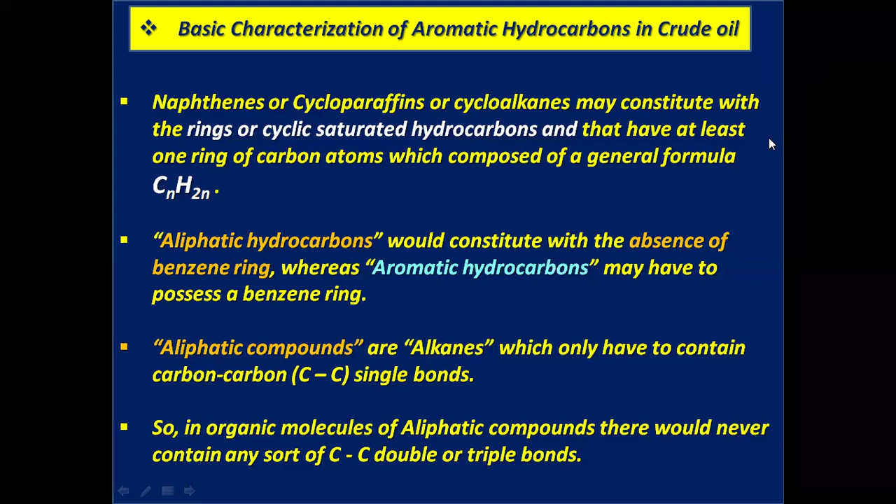Aliphatic compounds are alkanes which only have to contain carbon-carbon, that is CC single bonds. So, in organic molecules of aliphatic compounds, there would never contain any sort of CC double or triple bonds. Most important. Aliphatic compounds might be of different structures such as cyclic, linear, or even branched. The absence of multiple CC bonds in the structure of aliphatic compounds would therefore be represented as the most distinguishing feature.

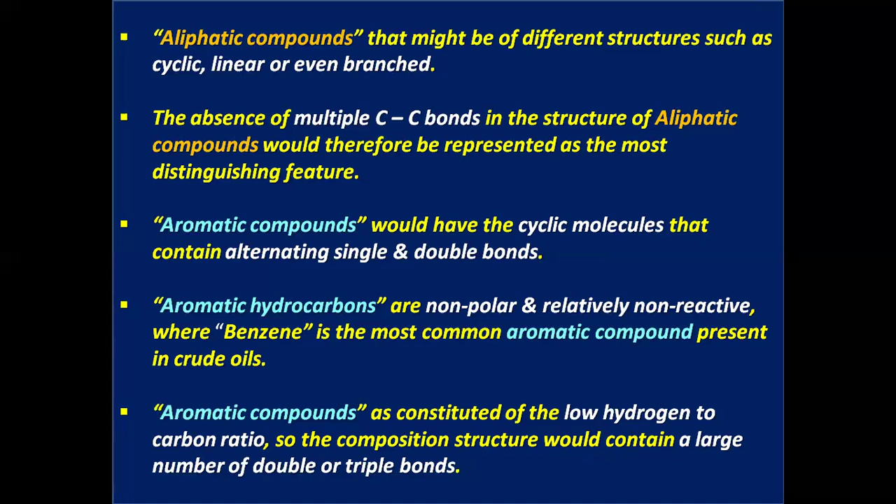Aromatic compounds would have the cyclic molecules that contain alternating single and double bonds. Aromatic hydrocarbons are nonpolar and relatively non-reactive type, where benzene is the most common aromatic compound present in crude oils. Aromatic compounds, as constituted of the low hydrogen to carbon ratio, so the composition structure would contain a large number of double or triple bonds. Aromatic compounds are thus to exhibit a high degree of chemical stability compared to alkanes and cycloalkanes, saturated aliphatic compounds.

Aliphatic hydrocarbons would be the most abundant fraction in crude oil whose molecules are linear or branched open chain structures, such as n-alkanes, isoalkanes, cycloalkanes, naphthenes, etc. Aliphatic hydrocarbons may be of saturated or unsaturated hydrocarbons with having double carbon bonds. However, saturated and unsaturated hydrocarbons would depend on the type of bonds they contain.

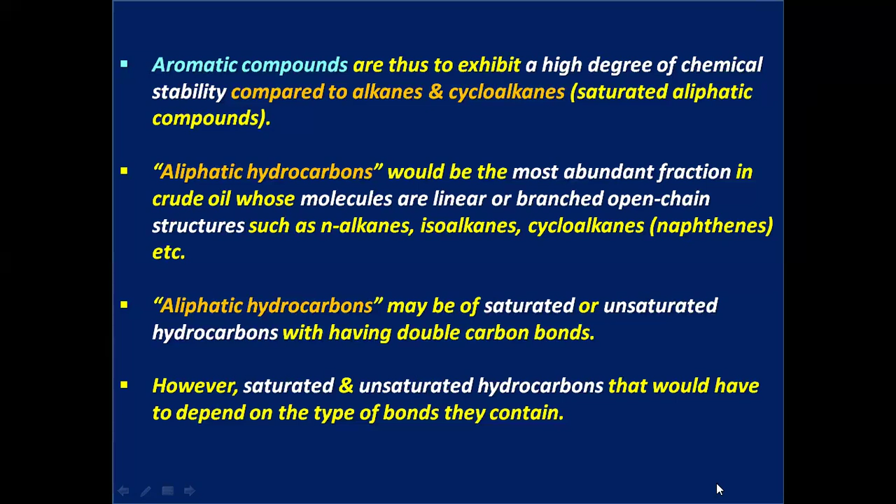Saturated hydrocarbons should contain only single covalent bonds, that is alkanes, whereas unsaturated hydrocarbons would contain at least one or more double CC bonds, that is alkenes, or triple CC bonds, that is alkynes. Due to the presence of multiple bonds in unsaturated hydrocarbons, these hydrocarbons are much more reactive than the saturated hydrocarbons. Again, I repeat, due to presence of multiple bonds in unsaturated hydrocarbons, these hydrocarbons are much more reactive than the saturated hydrocarbons.

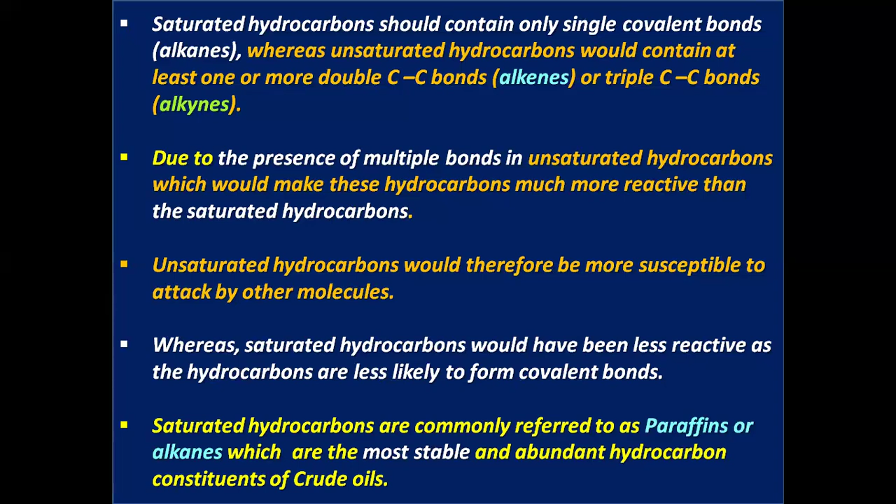Unsaturated hydrocarbons would therefore be more susceptible to attack by other molecules, whereas saturated hydrocarbons would have been less reactive as the hydrocarbons are less likely to form covalent bonds. Saturated hydrocarbons are commonly referred to as paraffins or alkanes, which are the most stable and abundant hydrocarbon constituents of crude oils. Unsaturated hydrocarbons are commonly referred to as olefins or alkenes. However, olefins are not naturally occurring constituents of crude oil. Normally, olefins would have been produced during the active process of the crude oil refining cycle.

Aliphatic saturated hydrocarbons with low molecular weight would be of liquid or gaseous form, which include methane, that is CH4, ethane, CH3CH3, propane, that is CH3CH2CH3, and butane, CH3(CH2)2CH3. Perhaps in most of the crude oils, the absolute amounts of aliphatic hydrocarbons with high molecular weight are found to be quite small, which may generally be of the order 0.5 to 2 weight percentage. These crudes are commonly referred to as the high wax crude oils.

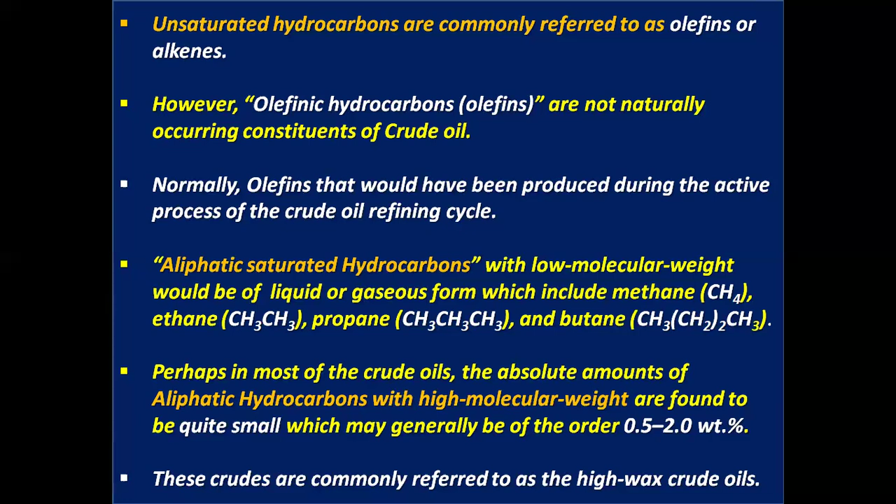Evaluation of crude oil characteristics. Elements present in crude oils would thereby form a large variety of complex molecular structures and thus depend on the actual variation in proportions of these constituents, causing a wide change in chemical as well as physical properties of the crude oils. In normal case, crude oils are often categorized on the basis of chemical composition as constituted by the proportion of hydrocarbon contents.

There are different classes of hydrocarbons which would be the bulk of the constituents present in crude oils. So, crude oils are thus characterized by the molecular distribution of individual hydrocarbon composition along with the presence of sulfur content. Apart from all sorts of variants, it has been evaluated that most of the crude oils, as being composed of hydrocarbons, may have the possible range of 12 to 15% hydrogen by weight and 82 to 87% carbon by weight.

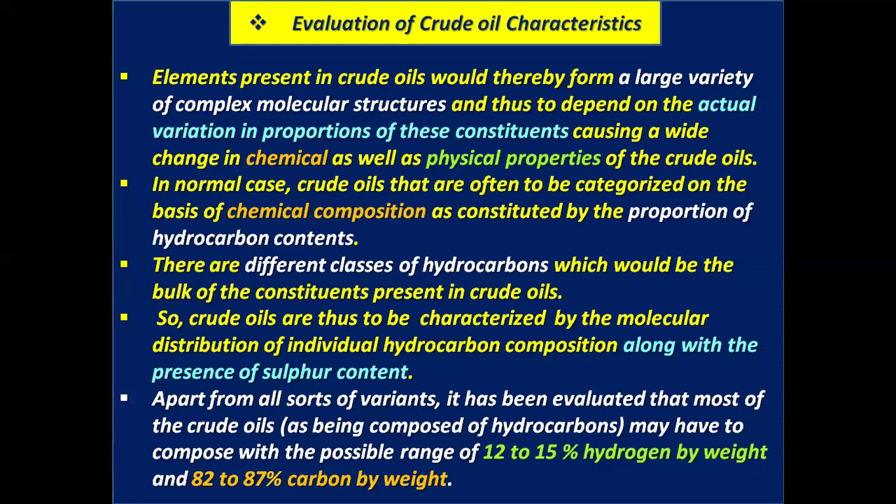Most important, 12 to 15% hydrogen by weight and 82 to 87% carbon by weight. The non-hydrocarbon compounds such as sulfur, that is about 0.5 to 3% by weight. Oxygen is less than 1% by weight, and nitrogen is less than 1% by weight. Though their concentrations are very low, they still have a strong influence on the crude oil composite characteristics, out of which sulfur is the most critical component.

A sulfur content of 1% or more by weight present in crude oil, either as elemental sulfur or in compounds such as hydrogen sulfide, would be rather alarming, and needs to be extracted from crude oil during refining. Through analysis, it has been established that heavier crude oil generally has a higher percentage of sulfur by weight. Specific gravity is therefore the most important physical property through which crude oils can be classified as heavy, medium, and light.

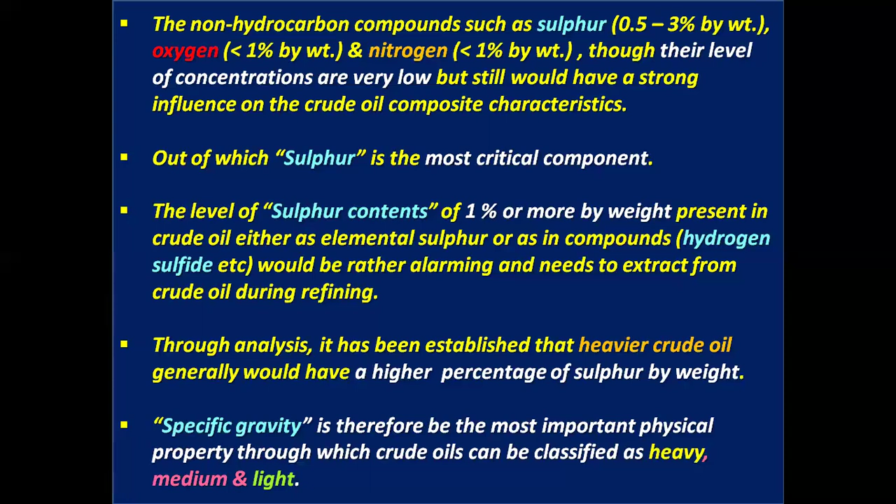API gravity equation. The physical properties of crude oils differ substantially due to variation of chain length of the constituent hydrocarbons and additional components such as sulfur. During production of crude oils, the classifications heavy, medium, and light can be evaluated by determining the values of density, specific gravity, and API gravity. All these parameters are measured in accordance with the process recommended by the standards ASTM D5002 and ISO 12185. The American Petroleum Institute, API, has standardized a unit for liquids called API gravity.

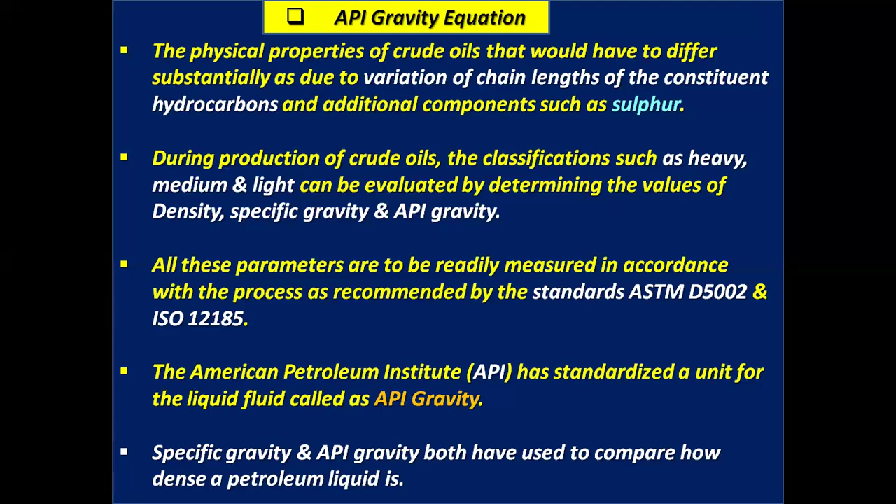Specific gravity and API gravity are both used to compare how dense a petroleum liquid is. The American Petroleum Institute has adopted the process to provide a standard way of measuring the density of crude oil and liquid hydrocarbons. The API gravity scale is based on the principle of comparing the weight of a given volume of liquid hydrocarbons with the weight of an equal volume of water.

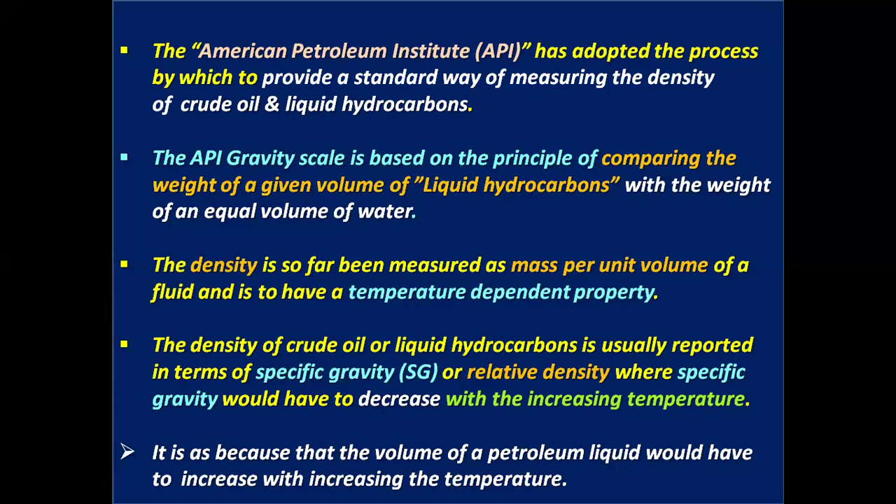Density is measured as mass per unit volume of a fluid and is a temperature dependent property. The density of crude oil or liquid hydrocarbons is usually reported in terms of specific gravity or relative density, where specific gravity decreases with increasing temperature. This is because the volume of a petroleum liquid increases with increasing temperature. So, the density must be measured at a given temperature, and according to the API standard, the measuring temperature is 15.6 degrees centigrade, that is 60 degrees Fahrenheit.

Therefore, specific gravity of liquid hydrocarbon is equal to the density of liquid hydrocarbon at 15.6 degrees centigrade divided by the density of liquid water at 15.6 degrees centigrade. Density of liquid water at the reference temperature 15.6 degrees centigrade is 0.999 grams per centimeter cube. Specific gravity of liquid hydrocarbon equals density of liquid hydrocarbon at 15.6 degrees centigrade divided by 0.999 grams per centimeter cube.

The measuring scale of API gravity is calibrated in degrees API and calculated from the following equation. API gravity, degree API of liquid hydrocarbon, equals 141.5 divided by specific gravity of liquid hydrocarbon at 15.6 degrees centigrade. In contrast to the relation of specific gravity and temperature, the API gravity scale increases with the increase of temperature.

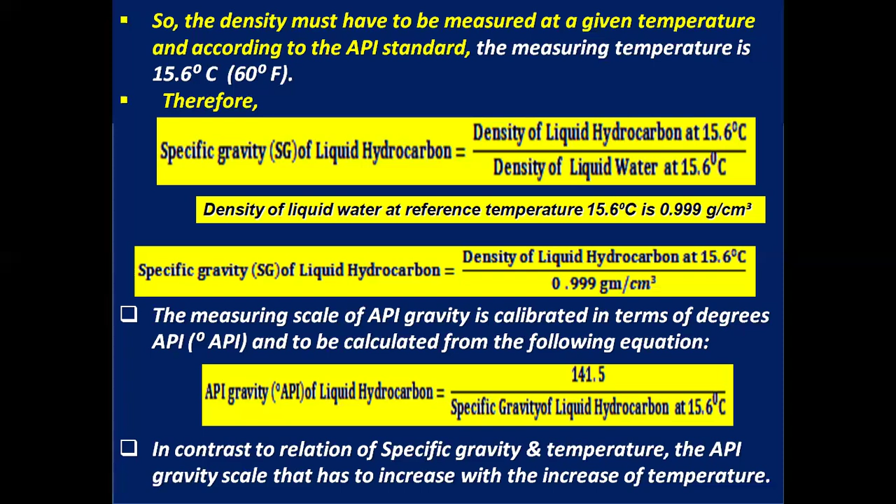Heavy crude oil is referred to as having an API gravity less than 20 degrees, and crude oil having an API gravity less than 10 degrees is referred to as extra heavy crude oil. So, heavy crude oil has API gravity less than 20 degrees, and crude oil having API gravity less than 10 degrees is referred to as extra heavy crude oil.

As compared to lighter grade crude oils, the physical properties differ in the case of heavy crude oils, which include higher viscosity and specific gravity, with a hydrocarbon composition of higher molecular weight. Extra heavy crude oil correlates with the various physical and chemical properties of natural or crude bitumen having a viscosity greater than 10,000 centipoise. 1 centipoise equals 10 to the power minus 2 poise, that is 0.001 kg per meter second.

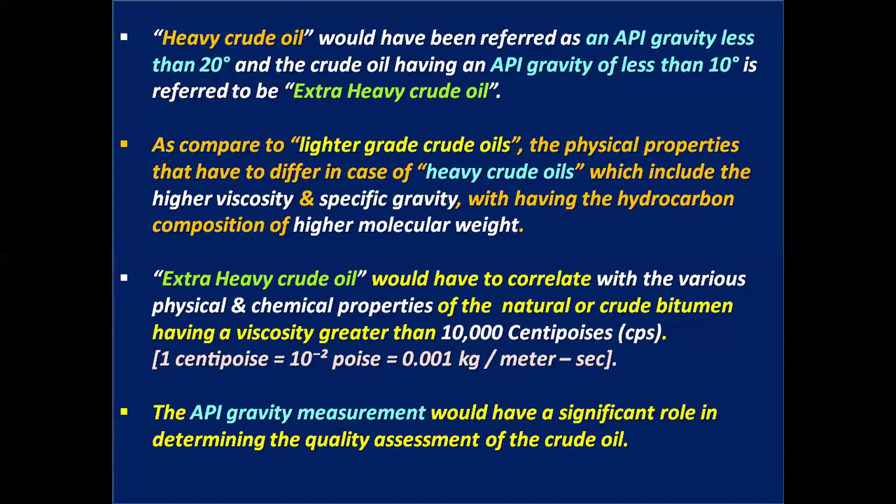The API gravity measurement would have a significant role in determining the quality assessment of the crude oil. However, along with viscosity and API gravity, it is very important to verify the hydrogen to carbon atomic ratio, oxygen to carbon atomic ratio, volatiles, composition of hydrocarbon compounds, as well as presence of sulfur content in crude oils.

Through API gravity measurements, the refineries would be able to optimize their operational as well as processing techniques of refining the crude oils, with temperature-oriented different composition and their chemical characteristics. Most important, the lighter and less dense crude oils, which have higher API gravity values, are often considered more desirable in high value industrial applications. That is, the cost of lighter or less dense crude oils is much higher as compared to heavy or extra heavy crude oils.

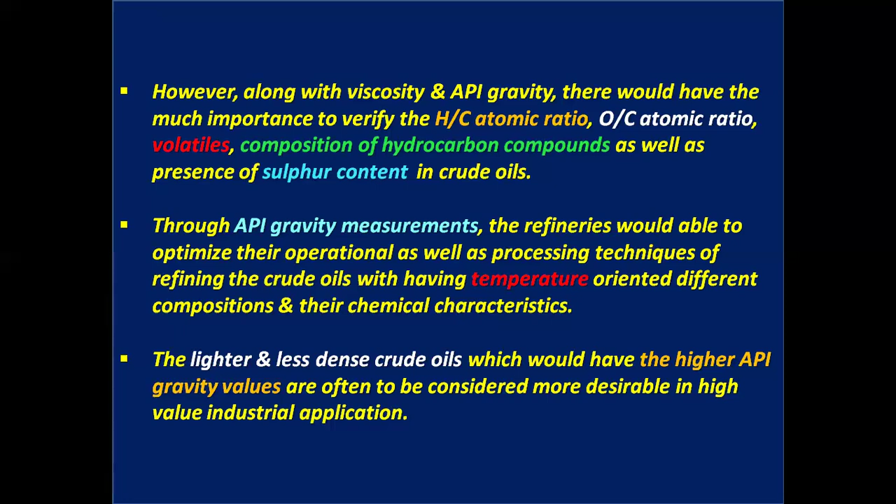Criteria for determining the crude oil quality assessment. Many types of crude oil with different quality characteristics are produced around the world and are categorically distinguished by their respective underlying elemental compositions. See, the elements in crude oil and their composition in weight percentage: carbon, 83 to 87. Hydrogen, 10 to 14. Sulfur, 0.05 to 5. Oxygen, 0.05 to 2. Nitrogen, 0.1 to 0.2. Nickel, less than 120 ppm. Vanadium, less than 1200 ppm. Sodium, 20 to 2000 milligram per kg of crude oil approximately.

Now, crude oil composition, therefore, is a mixture of hydrocarbon compounds, for example, paraffinic, naphthenic, and aromatics, plus small amounts of organic compounds of sulfur, oxygen, and nitrogen, plus small amounts of metallic compounds of vanadium, nickel, and sodium.

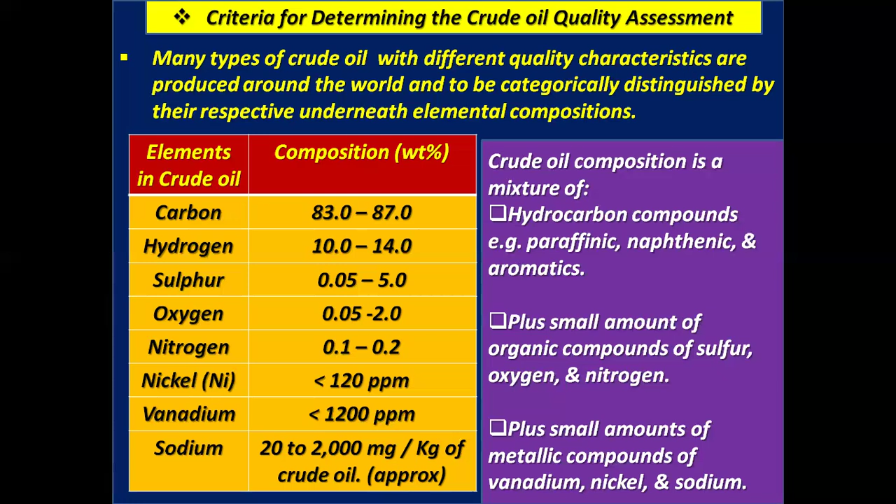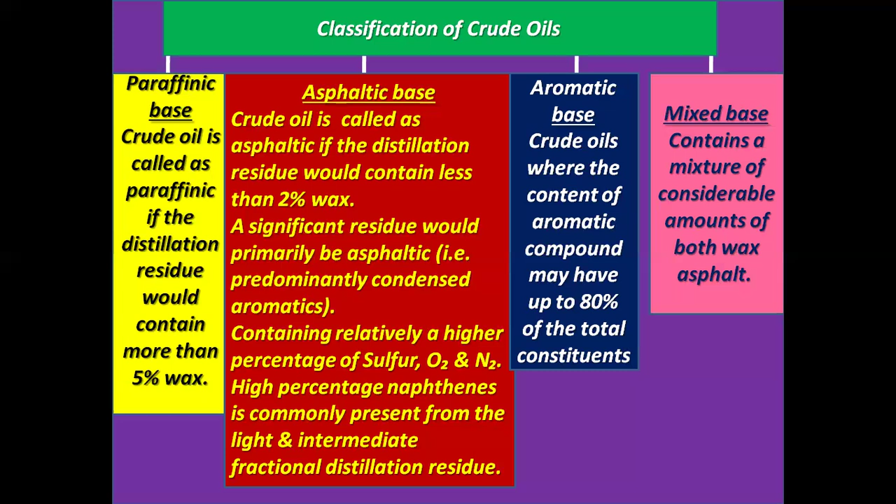The characteristics of crude oils vary mainly because of the variation in their basic internal composition, which corresponds to different proportions of various molecular types and molecular weights of hydrocarbons. Classification of crude oil is determined through evaluating three of the most critical characteristics: density, sulfur content, and total acid number, that is TAN count. Crude oil viscosity is one of the most important physical properties, which is a strong function of temperature, pressure, specific gravity, degree API gravity, and hydrocarbon composition of the oil.

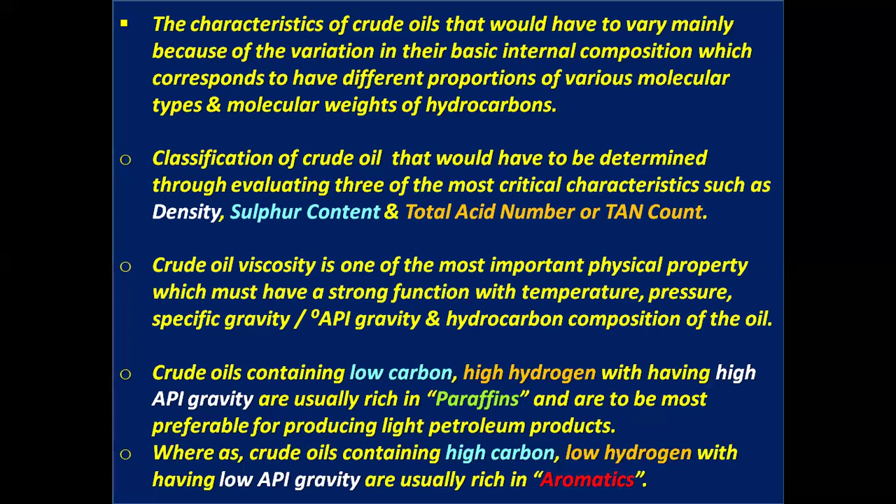Crude oils containing low carbon, high hydrogen with high API gravity are usually rich in paraffins and are most preferable for producing light petroleum products. Whereas crude oils containing high carbon, low hydrogen with low API gravity are usually rich in aromatics. The pour point of crude oils is another important physical property, the temperature at which the oil loses its flow capability under gravity. Determination of viscosity and pour point would ascertain the flow as well as handling characteristics of crude oil under low temperature conditions.

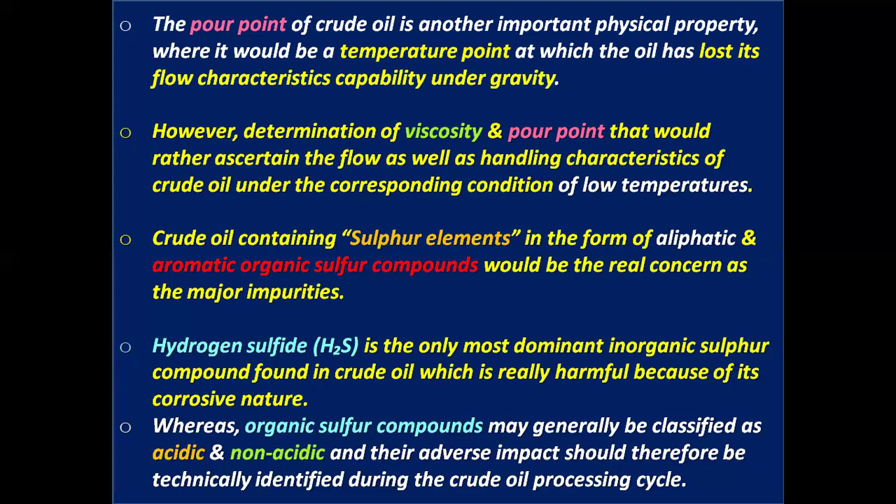Crude oil containing sulfur in the form of aliphatic and aromatic organic sulfur compounds is the real concern as the major impurity. Hydrogen sulfide, H2S, is the most dominant inorganic sulfur compound found in crude oil, which is really harmful because of its corrosive nature, whereas organic sulfur compounds may generally be classified as acidic and non-acidic, and their adverse impact should be technically identified during the crude oil processing cycle. Let's stop here, to be continued at a later stage.